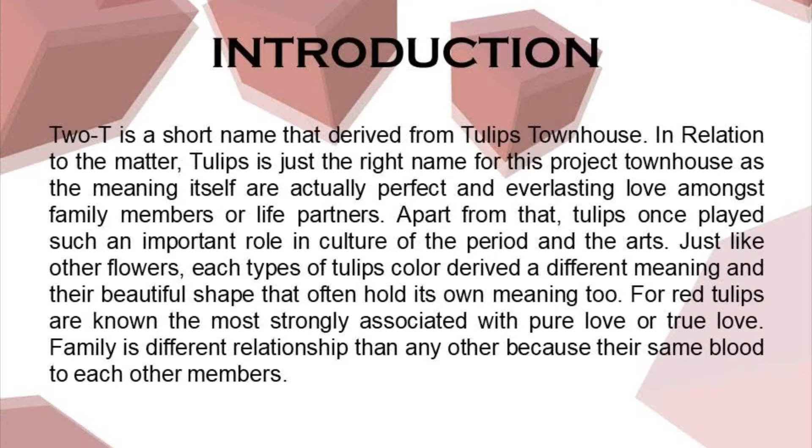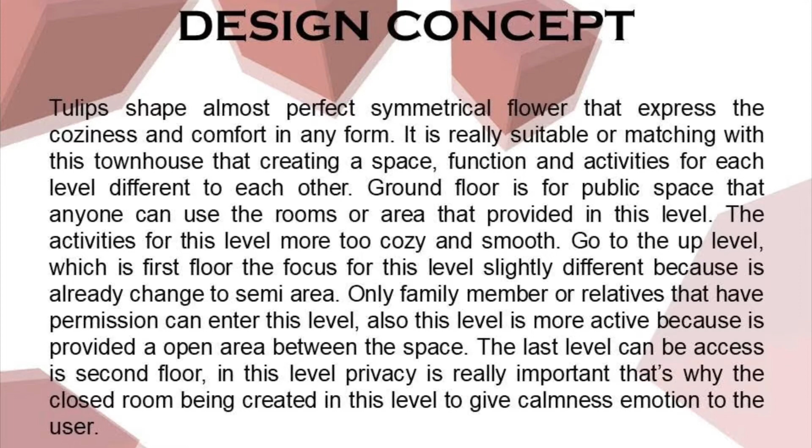For the design concept of this project, it is the tulip shape, an almost perfect symmetrical flower that expresses coziness and comfort in any form. It is really suitable for this townhouse, creating a space, function and activities different for each level. For example, the ground floor is for public space, the first floor is focused on semi-private area, and the second floor is for private access, which is really important - that's why closed rooms are created in this level to give a calming emotion to the user.

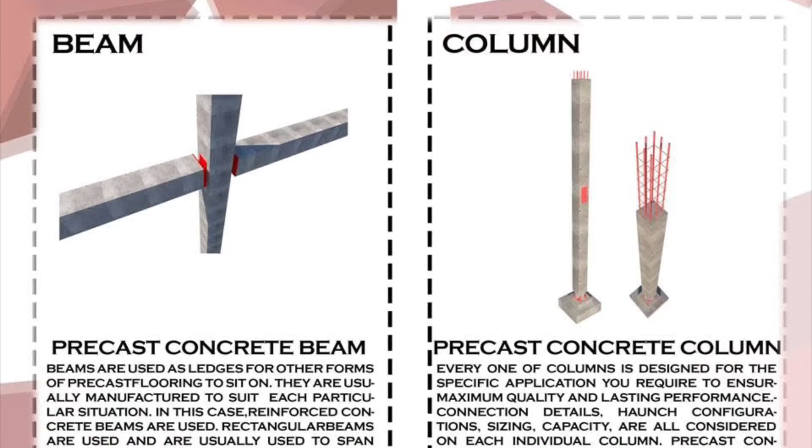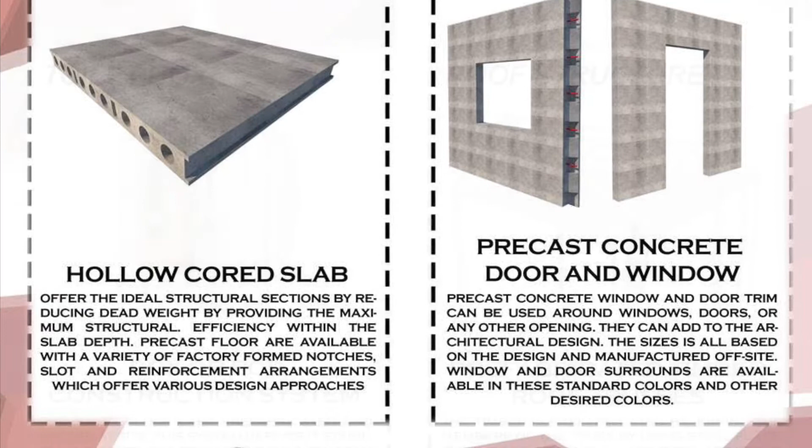So for the IBS components and installation of this building: beam - we are using precast concrete beam; column - precast concrete column; staircase - precast concrete stairs; wall - precast concrete panel; floor slab - hollow cored slab; openings - precast concrete door and window; toilet box or pod construction system; roof structure - prefabricated timber roof trusses.

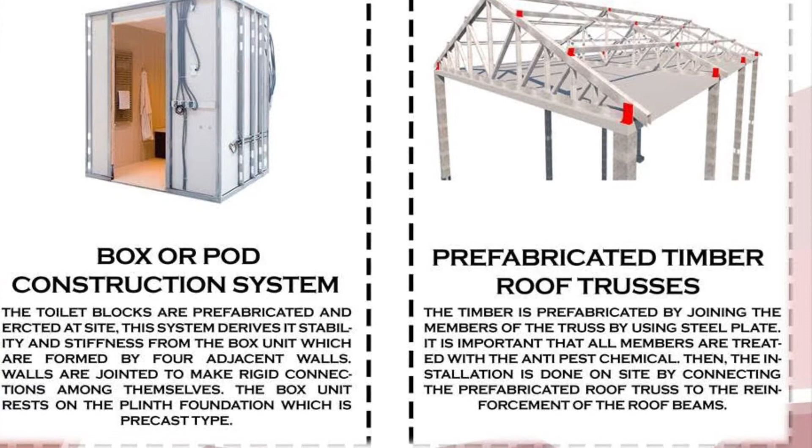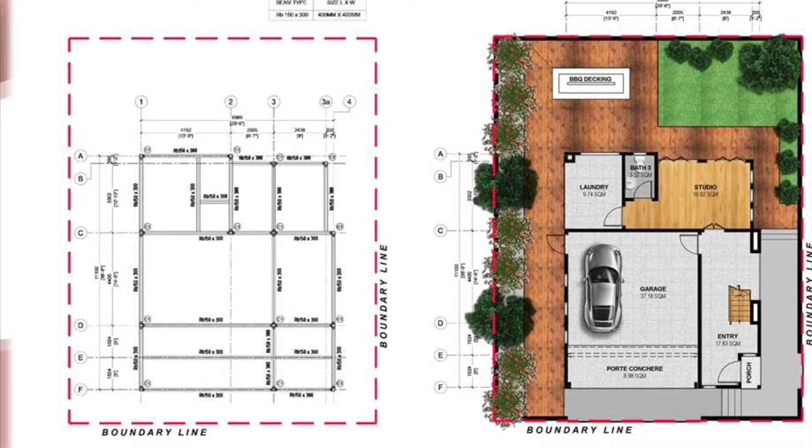So we go through the ground floor plan. We are attaching the ground floor layout plan also, and you can see all the columns placed in it. For the ground floor plan, we have the entrance space to go inside the building, a garage, a studio, and a bathroom and laundry. So we go through the first floor plan.

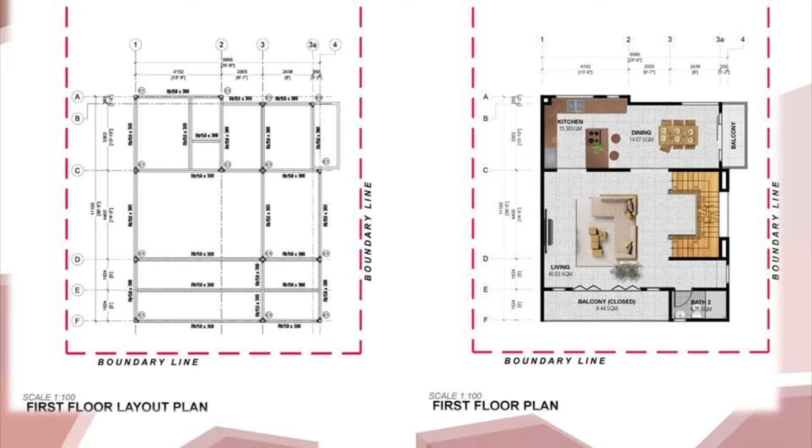Next is the roof layout plan. From here you can see the view of the plan itself. So we go through to the elevation part.

From the front elevation and right elevation, all the materials and methods we are using are related to the concept itself. The shape of the elevation is related to the tulip shape itself.

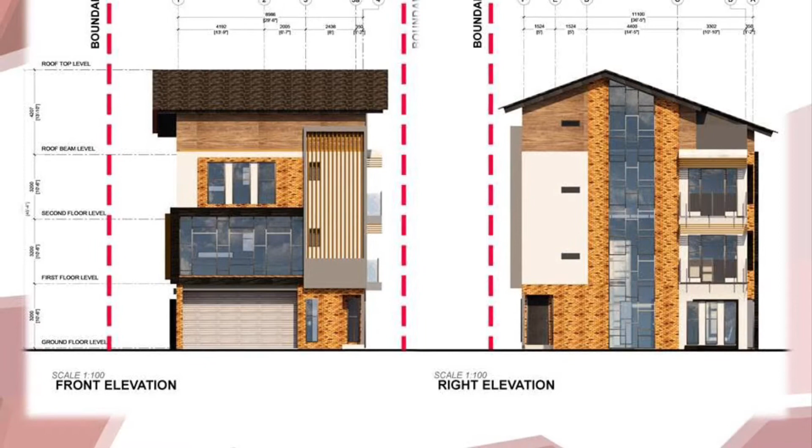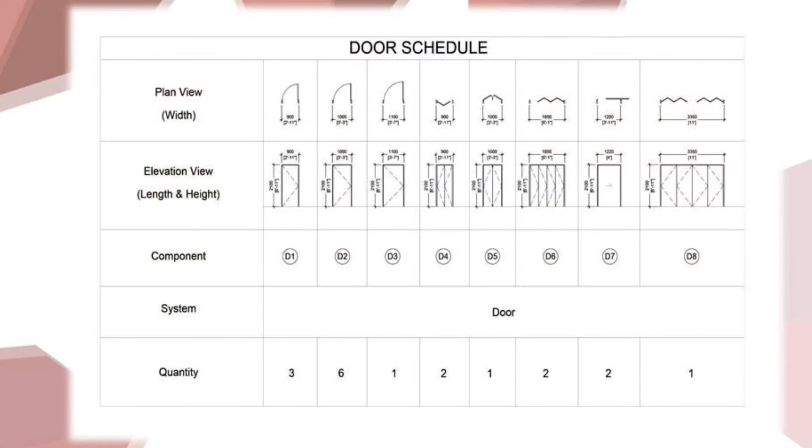Next is the door and window schedule. From here we are attaching the sizes of the doors and windows for this townhouse.

Next is the percentage of IBS scoring. Basically for the IBS score, it is a combination of the structural system at 50%, plus the wall system at 20%, and other simplified systems at 30%, which gives us 100%. This is the count for this IBS score. So we go through to the calculation principle.

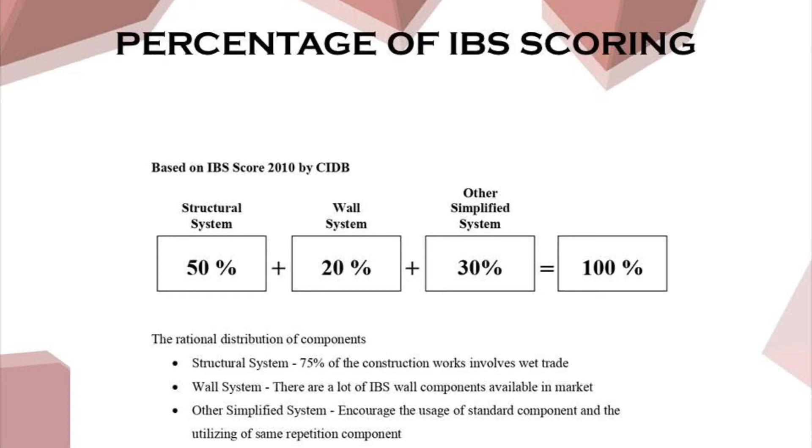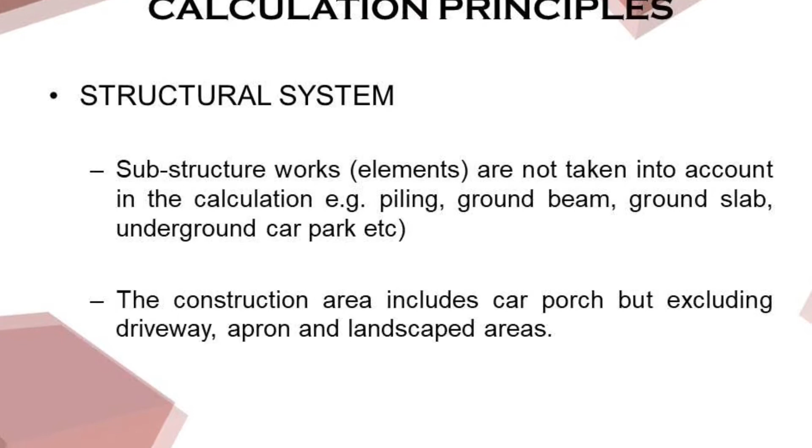What is meant by structural system? Structural system is a substructure whose elements are not taken into account in the calculation. Examples: piling, ground beam, ground slab, underground car park, and other similar examples. The construction area includes car porch, but excludes driveway, apron, and landscape areas.

Next is calculation principles for wall system. Points are awarded based on the wall system used, with allocation based on the percentage of the length of the wall system used. Toilet cubicle partition walls are excluded from the calculation, as they have a different calculation. Parapet and corridor must be counted in the calculation.

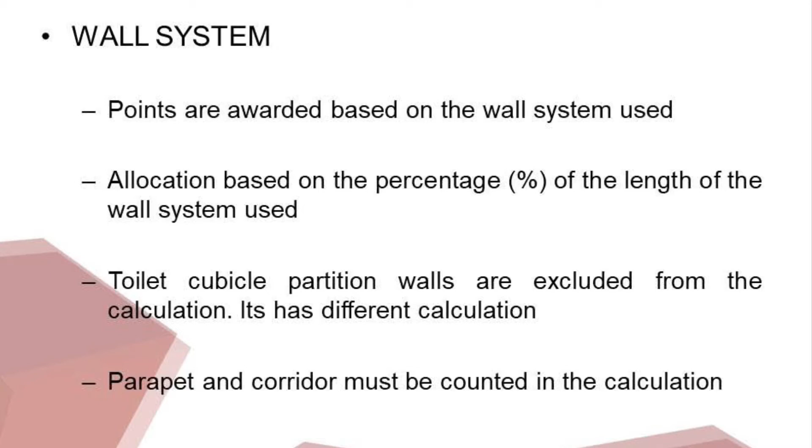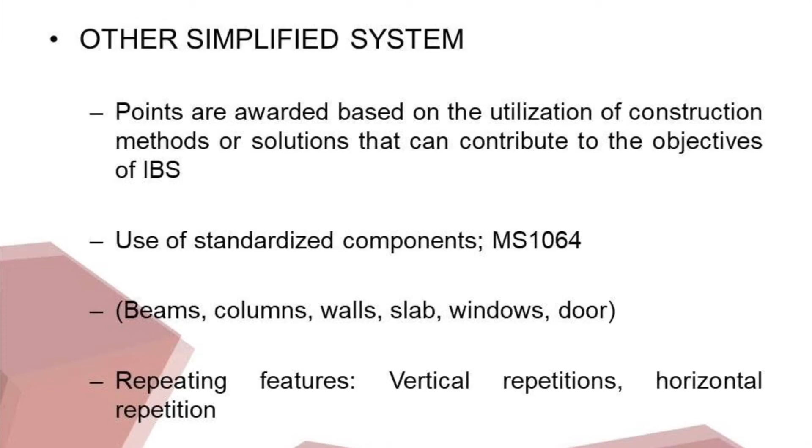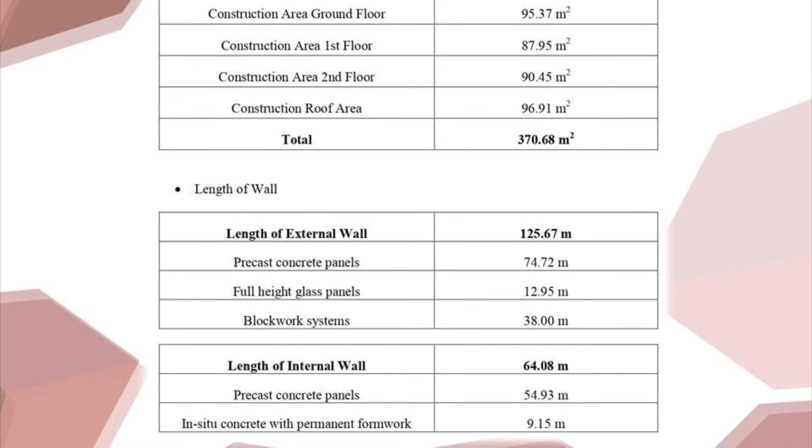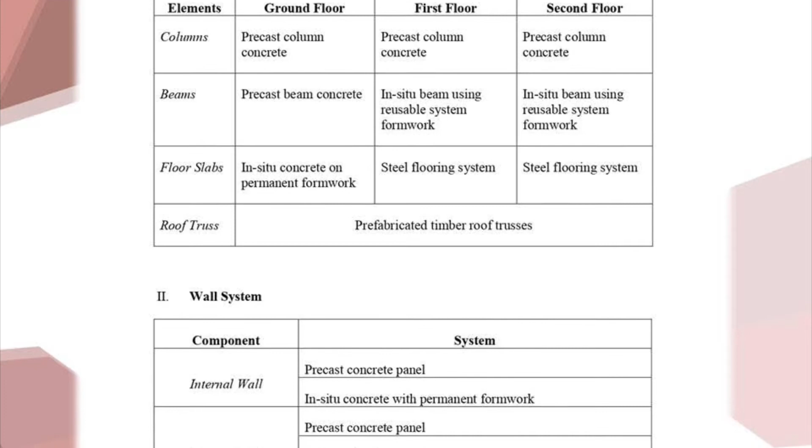So for structural system, we have column, beams, floor slab, roof trusses, for ground floor, first floor, and second floor. Next is wall system: the component for internal wall is precast concrete panel and in-situ concrete with permanent formwork, while external wall uses precast concrete panel, full height glass panel, and blockwork system.

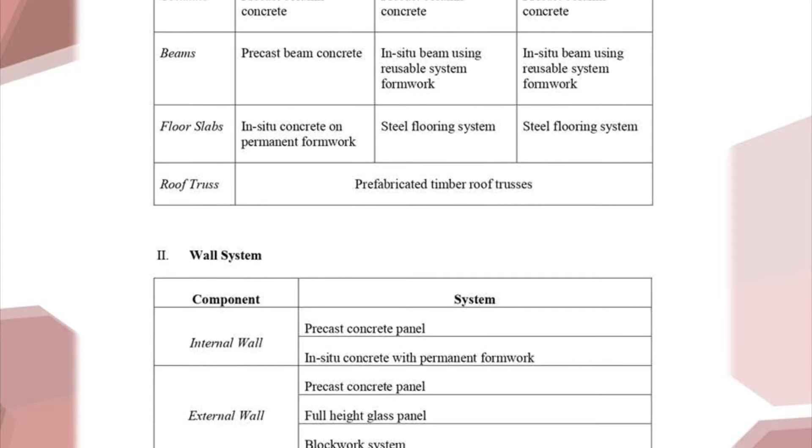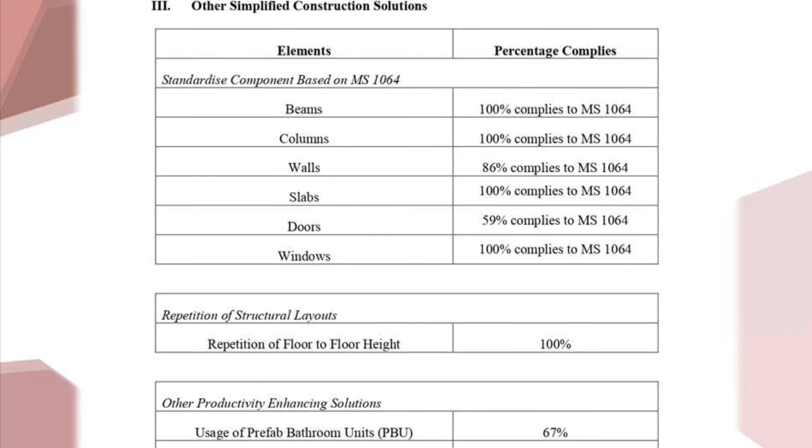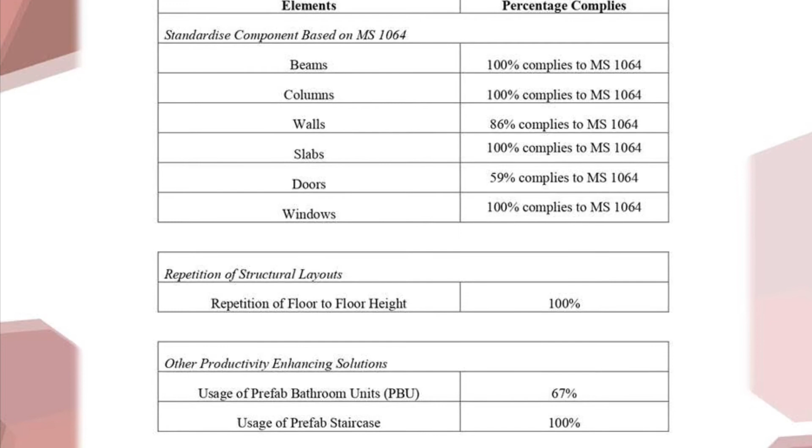Next is other simplified construction solution. The elements for the standardized component based on MS1064 are beams, columns, walls, slab, doors, and windows. Repetition of structure layout: repetition of floor to floor height is 100%. Other productivity enhancing solutions: usage of prefab bathroom unit is 67%, and usage of prefab staircase is 100%.

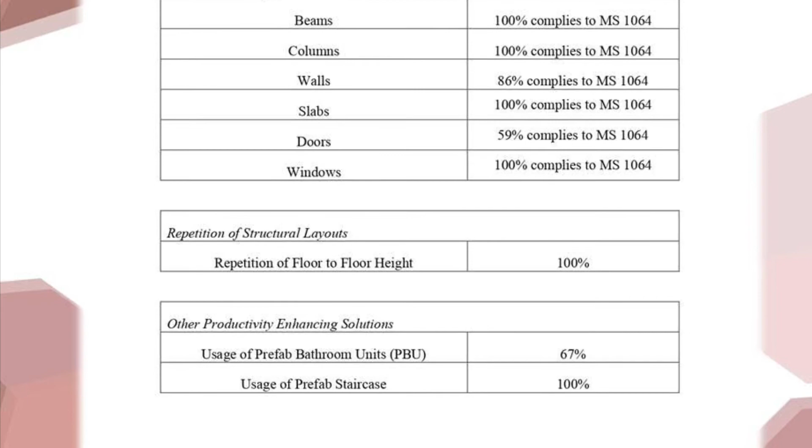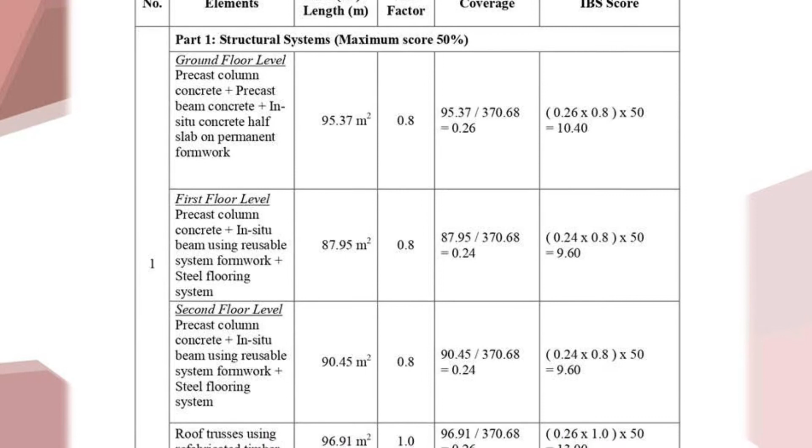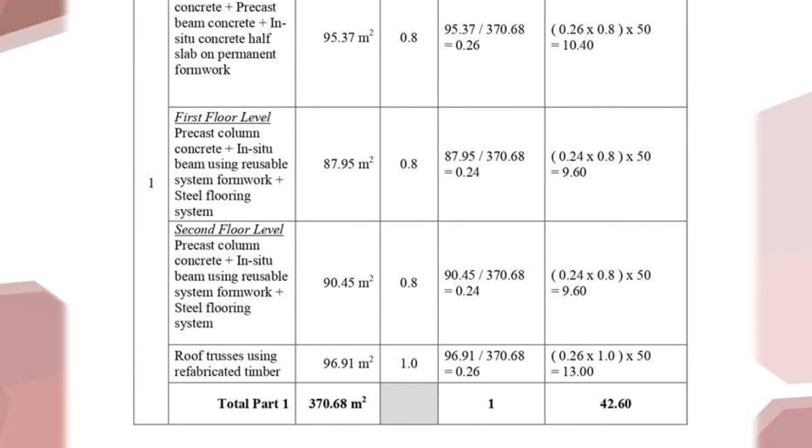So our calculation is for Part 1, structural system. The maximum score for this is 50%. As mentioned, the total part is 370.68 meters square. Coverage is 1. IBS score is 42.60. Basically this is how we calculate the IBS score.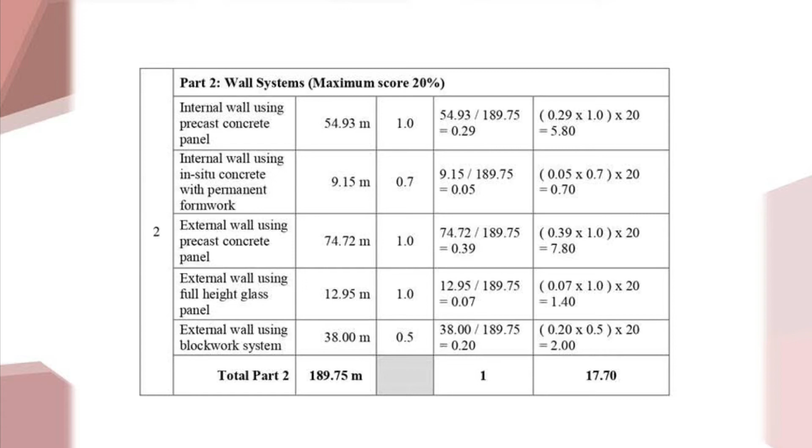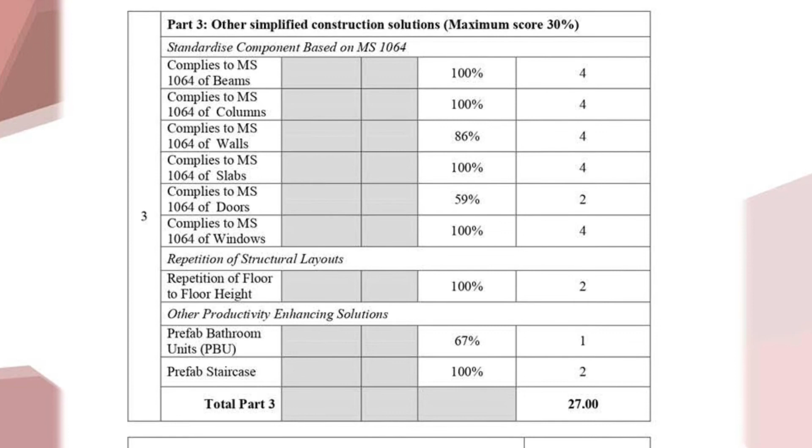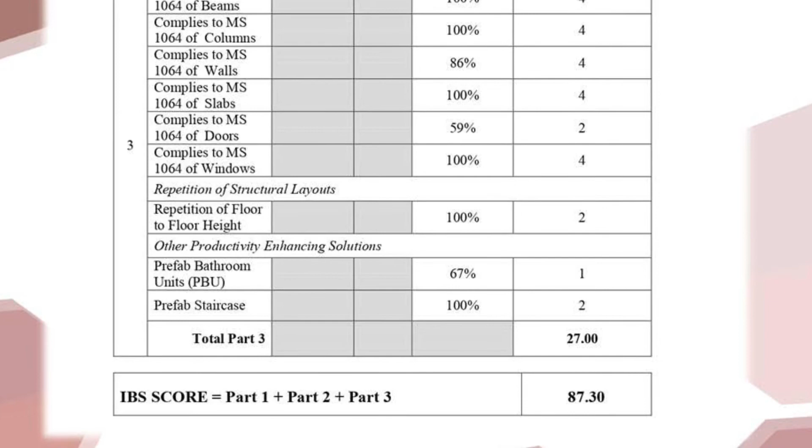17.70. Part 3, other simplified construction solution, maximum score is 30%. IBS score for Part 3 is 27.00. So the combination for our building, IBS score for Part 1 plus Part 2 plus Part 3, is 87.30. This is the IBS score table.

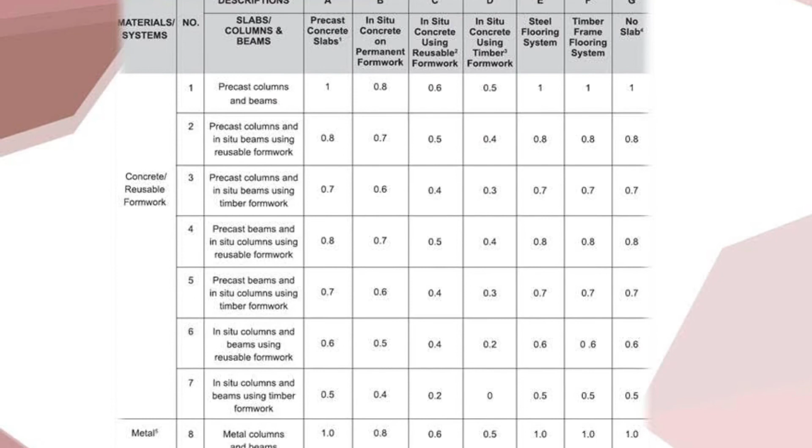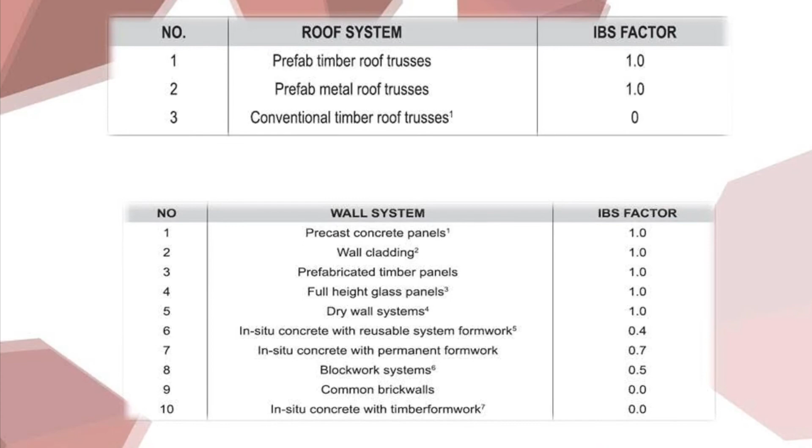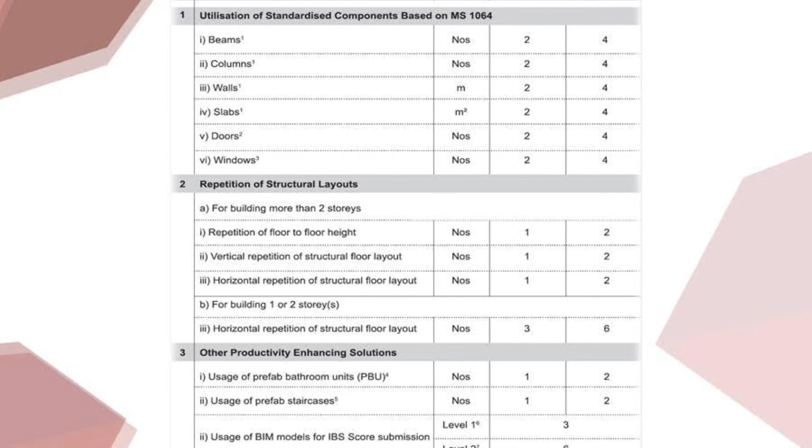From here you can see all the statements, all the elements, all the requirements, the materials part. This is the roof system, and this is the wall system part, with their IBS factor. This one is the description of utilization of standardized components, repetition of structural layout, and other productivity enhancing solution. Okay, that's all for that.

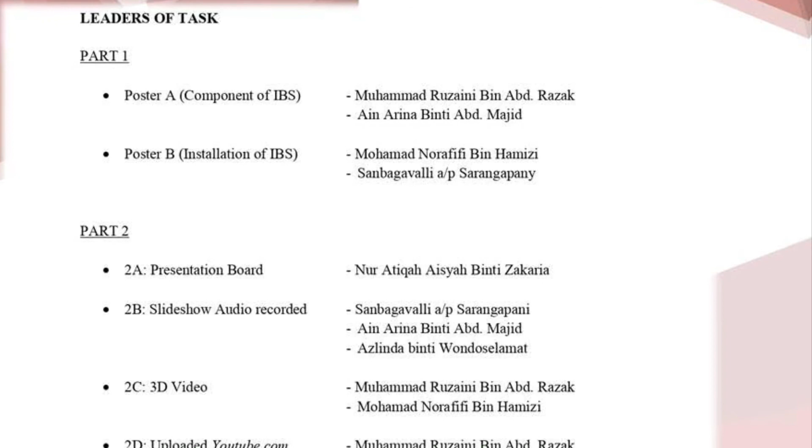So we are going to task of group works. Leaders of task Part 1: for Poster A is Muhammad Ruzaini bin Abdul Razak and Ain Arina binti Abdul Majid. Poster B, installation of IBS, is Mohamad Norafifi bin Hamizi, Sanbagavalli a/p Sarangapany.

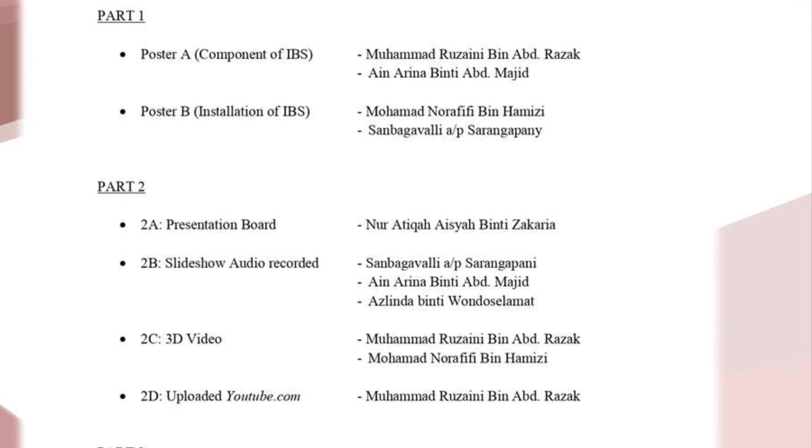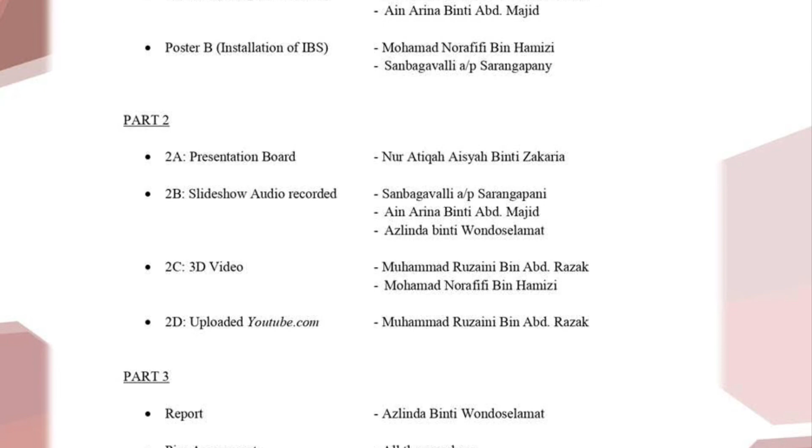Part 2, 2A presentation board is Nur Atiqah Aisyah binti Zakaria. 2B slideshow audio recording is Sanbagavalli, Perempuan Sarangapani, Ain Arina, and Azlinda. 2C, 3D video is Muhammad Ruzaini and Norafifi. 2D, uploading to YouTube, is Muhammad Ruzaini. Part 3, report is Azlinda, and peer assessment includes all members. So basically all members are involved for all the parts of work.

Okay, this is our task division. You can see here Mohamad Norafifi, Ain Arina, Azlinda, Muhammad Ruzaini, Nur Atiqah Aisyah, and Sanbagavalli.

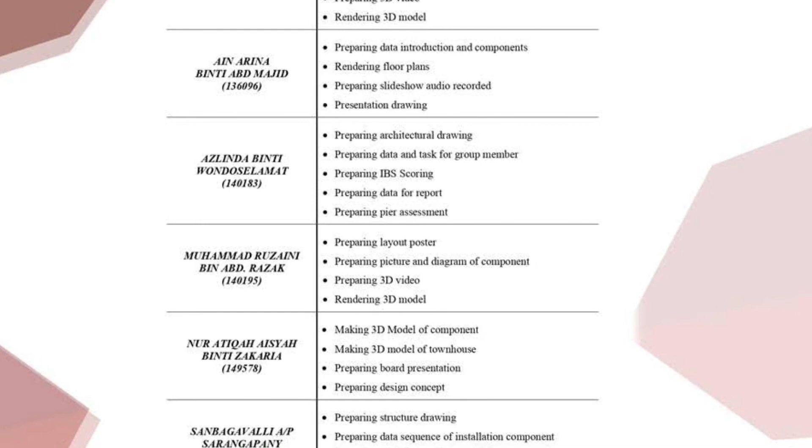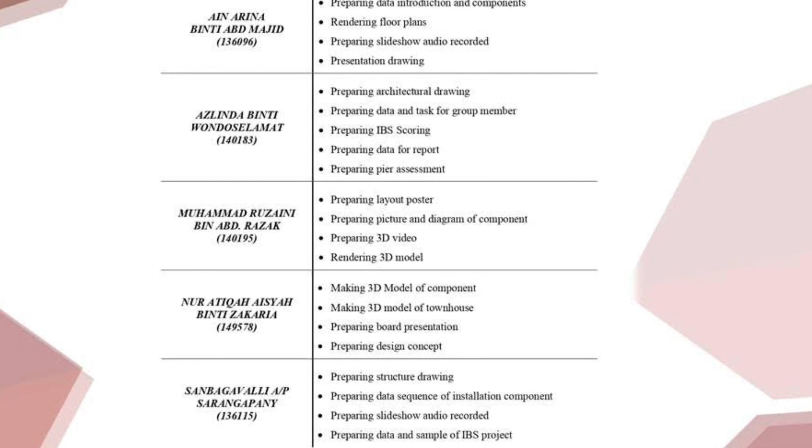Alright, so that's all from us. We are attaching all the requirements and more details in the other requirements.